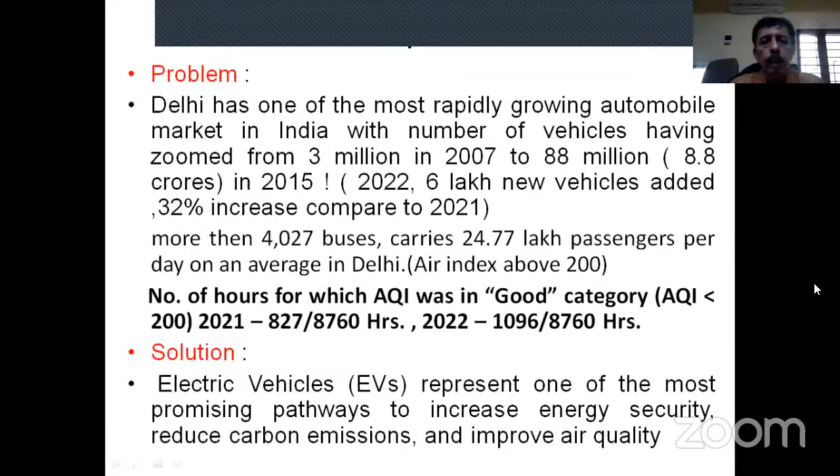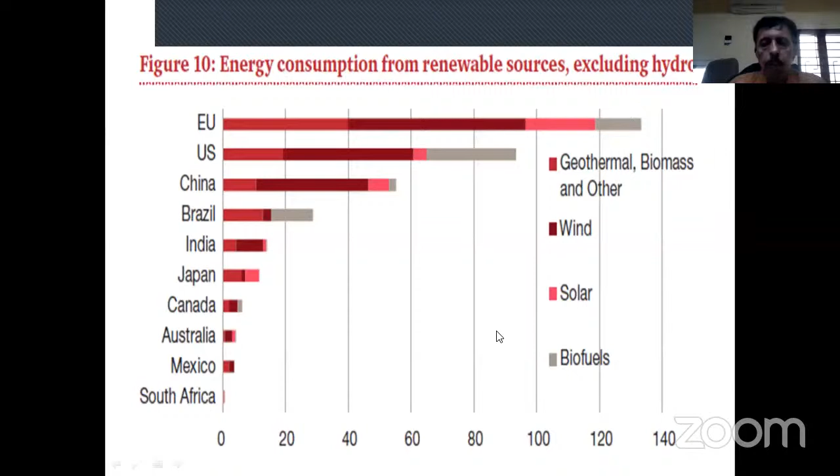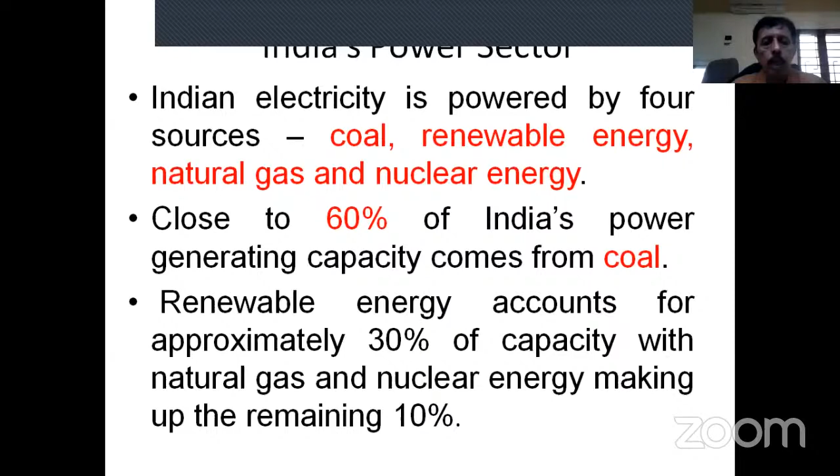India's power sector overview: Indian electricity is powered by 4 sources - coal, renewable energy, natural gas, and nuclear energy. Close to 60% of India's power generating capacity comes from coal. Renewable energy accounts for approximately 30% of capacity, with natural gas and nuclear energy making up the remaining 10%.

This is a comparison of power generation installed capacity in megawatts and percentage share, giving a clear picture of green energy development in the power sector. In 2019, renewable energy sources were at 74,082 MW out of total capacity. In 2021, it reached 1,04,879 MW, meaning 26.5%. In 2022, it reached 29.2%. Simultaneously, on the coal side, in 2019 the installed capacity share was 54.7%, reduced to 51.7% in 2021, and in 2022 it's 49.9%. This shows the overall development and implementation of green energy.

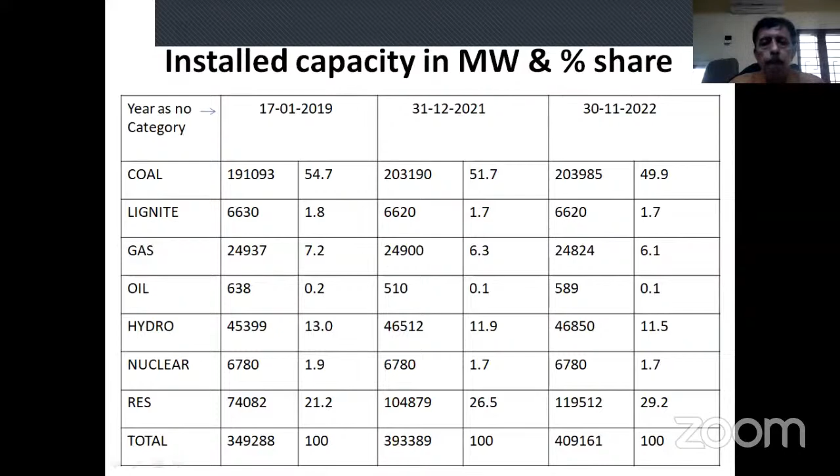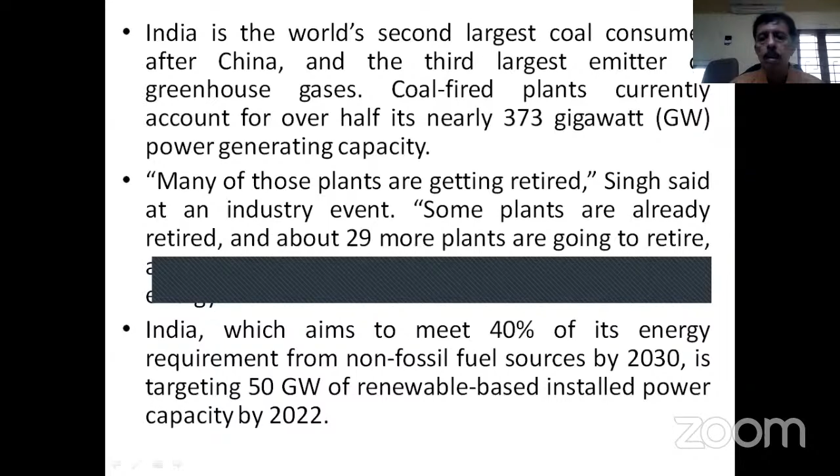Meanwhile, in 2016-17, electricity generation from coal-based plants accounted for more than 80% of the total power produced during the year. Private sector has had the highest share in coal-based generation, followed by the central and state sectors.

By 2022, renewables are expected to account for 33% of the country's power generation, and 60% by 2027, in terms of renewable power production.

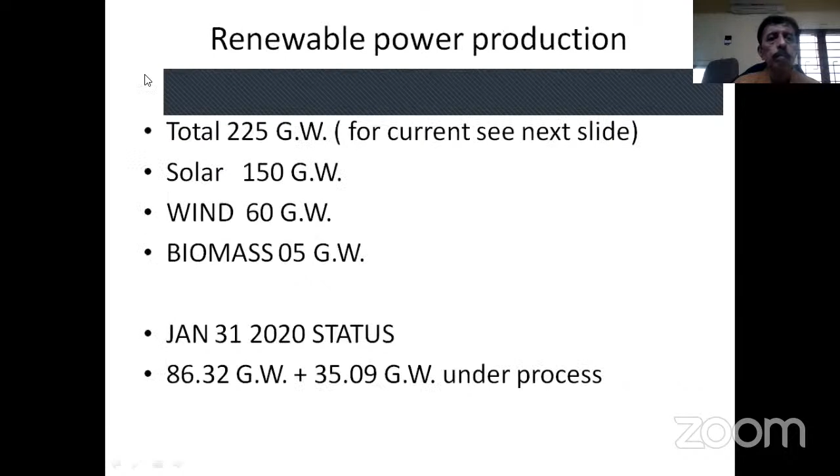According to the IEA coal report 2021, India's coal consumption will increase at an average annual rate of 3.9% to 1.18 billion tons in 2024, on the back of a GDP growth rate of 7.4% between 2022 and 2024, which will be partially fueled by coal. This is data as of 20 December 2021.

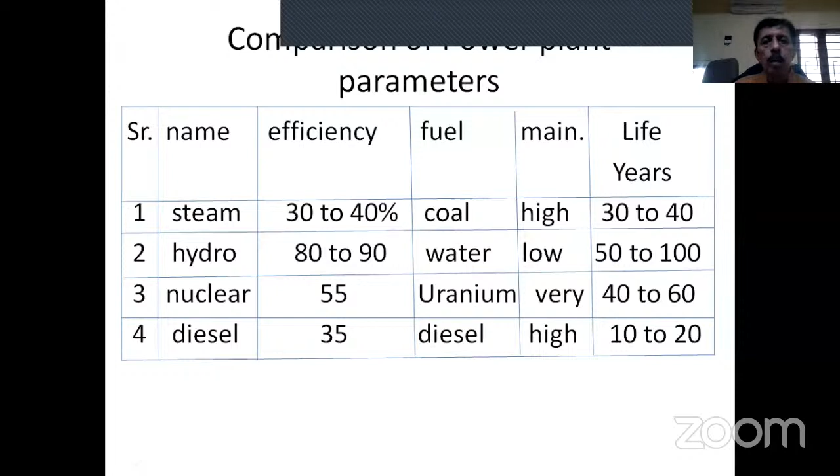So if we compare this, we can see that all power plants from non-renewable sources are up to 30 to 40% efficient, and that's why we are not getting much power from this type of source.

In that category, we don't have much development. And overall, wind operates at 40% efficiency at 9 meters per second, and solar is working at 20% efficiency.

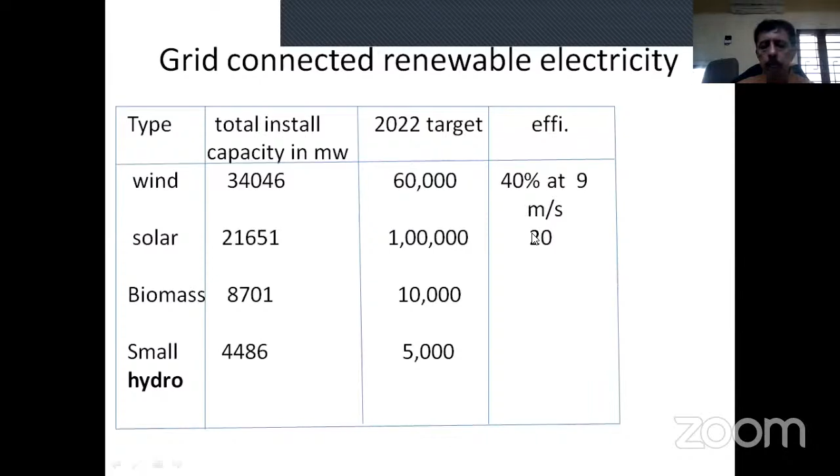Now, what is low carbon economy? We'll discuss. Low carbon economy refers to an economy that has a minimal output of greenhouse gas into the biosphere, namely an economic model based on small energy consumption, low environmental pollution, low carbon emission, and is an important progress of human beings after agriculture and industrial civilization. Briefly, the low carbon economy refers to the green economy based on low energy consumption and low pollution. The nature of low carbon economy is an important progress of human beings after agriculture and industrial civilization.

When we talk about the low carbon economy, we have to know about carbon credit. A carbon credit is the generic term for any tradable certificate or permit representing the right to emit 1 ton of carbon dioxide, or the mass of another greenhouse gas with carbon dioxide equivalent to 1 ton of carbon dioxide.

It is traded on the European Climate Exchange, and therefore if you emit 1 ton less, you will get 22 euros. Emit less and increase or add to your profit - this is the basis of carbon credit. A new study shows $185 per ton of CO2 means you will get $185 for 1 ton of CO2 less emission.

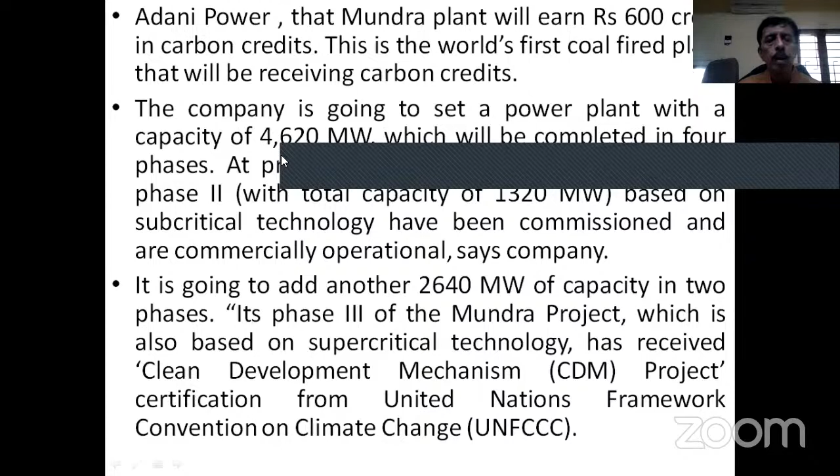The company is going to set up a power plant with a capacity of 4,620 megawatts, which will be completed in 4 phases. At present, all 4 units of phase 1 and phase 2, with a total capacity of 1,320 megawatts based on subcritical technology, have been commissioned and are commercially operational, as stated by the company.

It is going to add another 2,640 megawatts of capacity in 2 phases. This is phase 3 of the Mundra project, which is also based on supercritical technology. We will discuss supercritical technology at the end. This project has received a Clean Development Mechanism (CDM) project certification from the United Nations Framework Convention on Climate Change.

Similarly, with other power plants, we will discuss Torrent Power, Adani Power, JSW Steel, and their own power plant reducing equipment.

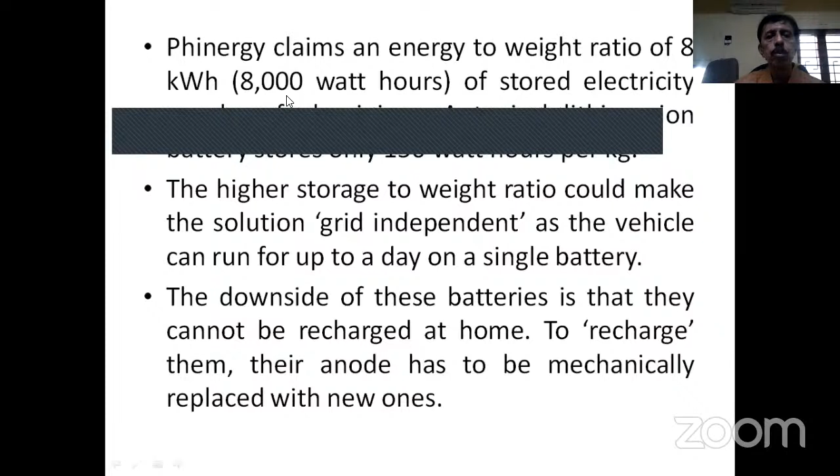Phinergy claims an energy to weight ratio of 8 kilowatt hours, meaning 8,000 watt hours of stored electricity per kg of aluminum. A typical lithium-ion battery stores only 150 watt hours per kg. So in this comparison we can see that aluminum air batteries will be more suitable for the next generation. The higher storage to weight ratio could make the solution grid independent, as the vehicle can run for up to a day on a single battery charge. The downside of this battery is that it cannot be recharged at home; to recharge it, the anode has to be mechanically replaced with a new one.

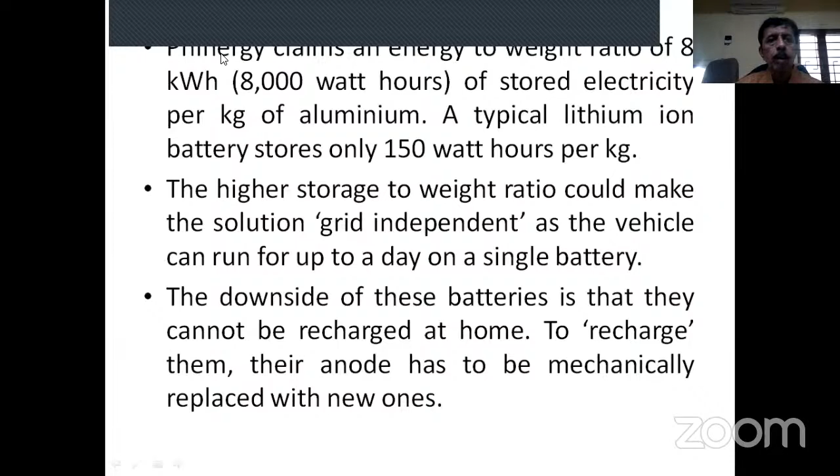Another development in the field of atomic power: the Kakrapar Atomic Power Station installed the largest nuclear reactor at 1,400 megawatts, producing 1.68 crore units of electricity using 3 kg of uranium. This is one of the most newly developed technologies, equivalent to 6,600 metric tons of coal. And this reactor is earthquake and missile attack proof, so this is also an important point to be addressed.

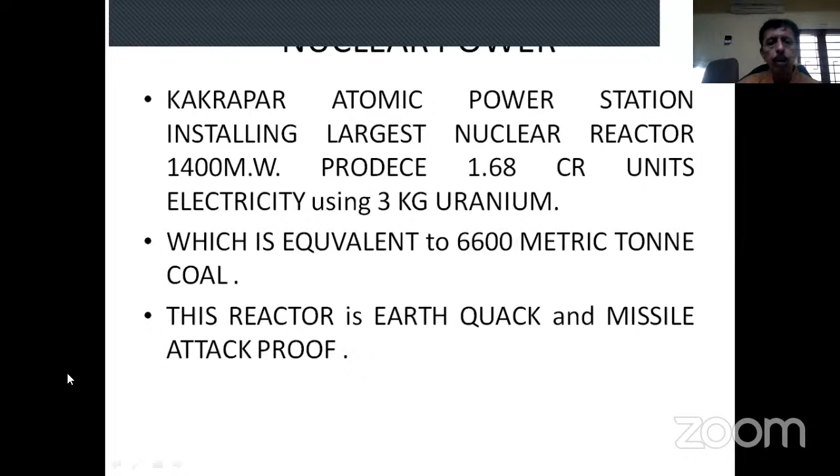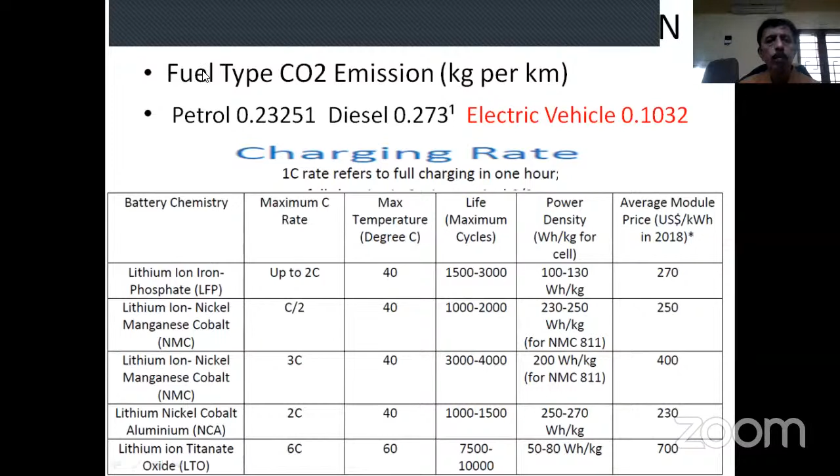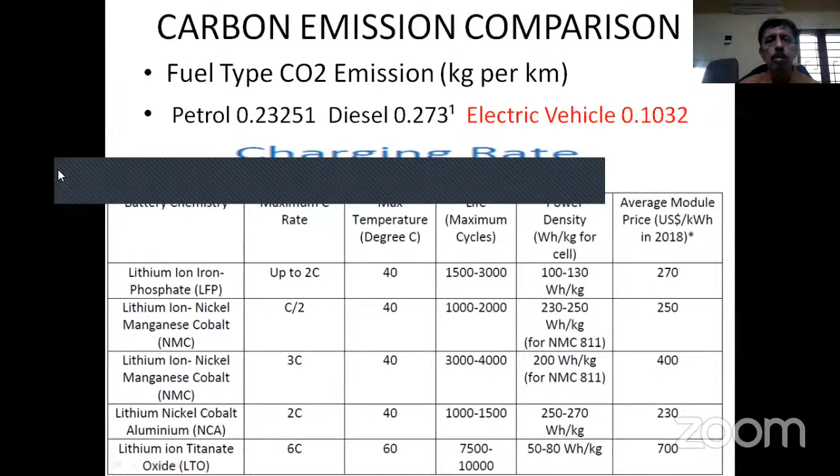This is the charging rate table. Looking at the latest developments, which reduce the maximum charging rate: up to 2C for some, lithium ion nickel manganese cobalt is C/2, another lithium ion nickel manganese cobalt variant is 3C, lithium nickel cobalt is 2C. This is the maximum charging rate, and this is the maximum temperature it can withstand. Lithium titanate is 6C. For life cycles, lithium ion nickel manganese cobalt has 3,000 to 4,000 cycles. We can also compare the power density and average module price. The lithium ion nickel battery is very good for use, but it costs more. The lithium ion titanate battery costs 700 per kilowatt hour.

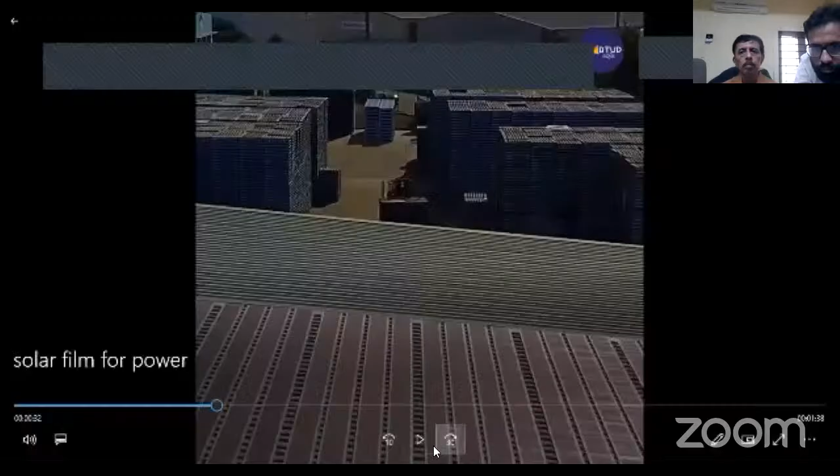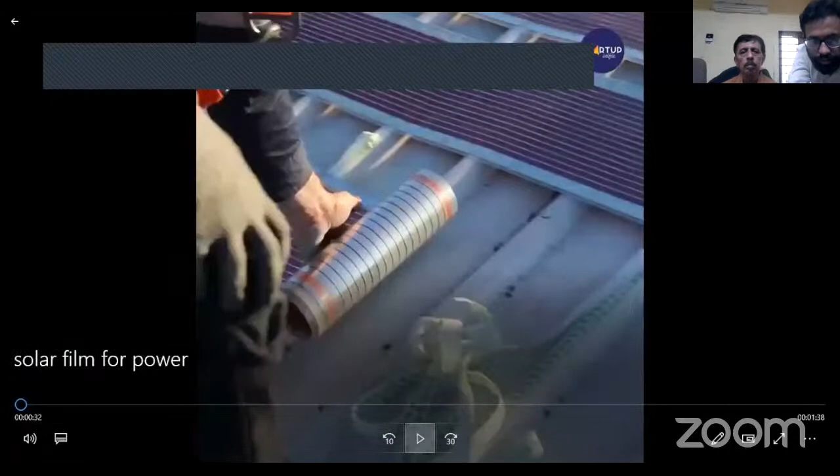Yeah. These ultra-thin solar panels can be printed like newspapers. The University of Newcastle, Australia has created printable photovoltaic solar cells, which could revolutionize urban power generation. The panels, which are only 0.075 millimeters thick, were created with proprietary technology, making use of organic polymers, which can capture solar energy and conduct electricity.

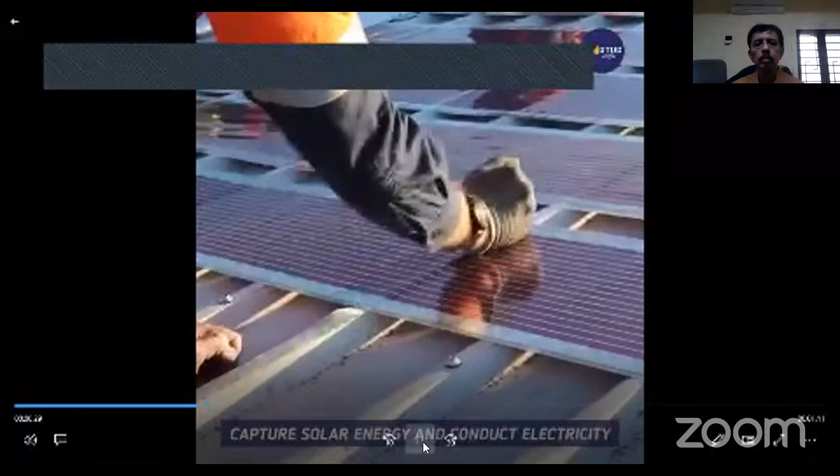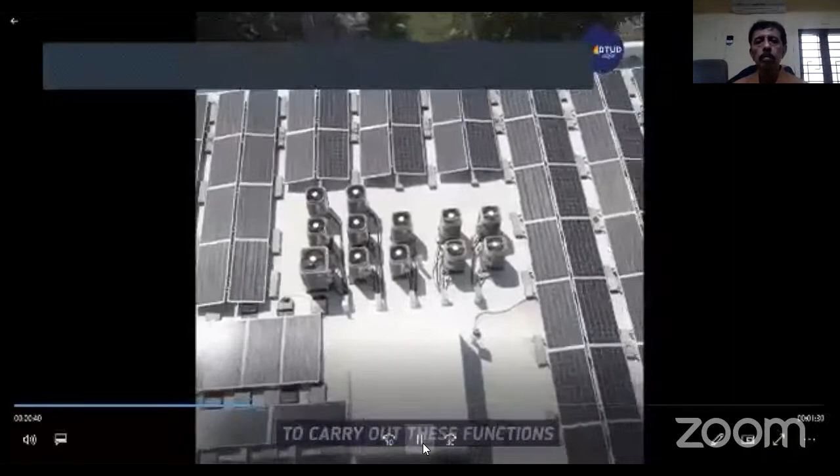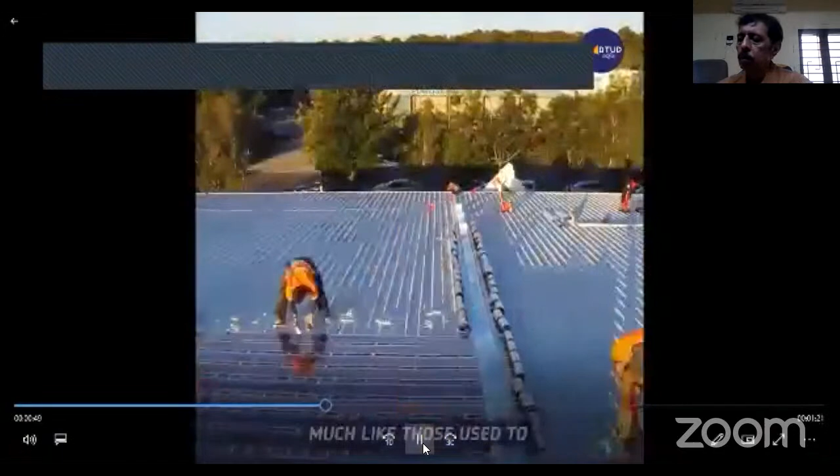Traditional photovoltaic solar panels rely on silicon to carry out these functions and can often weigh up to 15 kilograms per square meter. The liquid nature of the organic polymer means it can be printed from printers, much like those used to mass-produce newspapers and books.

According to University of Newcastle physics professor Paul Dastoor, printed solar technology has a number of broad applications, such as power for street lights, water pumps, disaster shelters, camping equipment, building smart blinds for buildings, and even powering vehicles.

The cost of production is also much cheaper than traditional panels, coming in at around 10 Australian dollars per square meter. A full-scale commercial plant could print kilometers of solar panels a day.

The printed sheets can also be stuck with a special adhesive tape to a variety of surfaces, meaning no expensive and intrusive installation methods.

The tech is currently on public display at the Canopy in Lane Cove on Sydney's North Shore. The panels, which are attached to a covered walkway, generate power for a series of lights that come on at night and track passers-by with sensors.

What do you think about the printed solar tech?

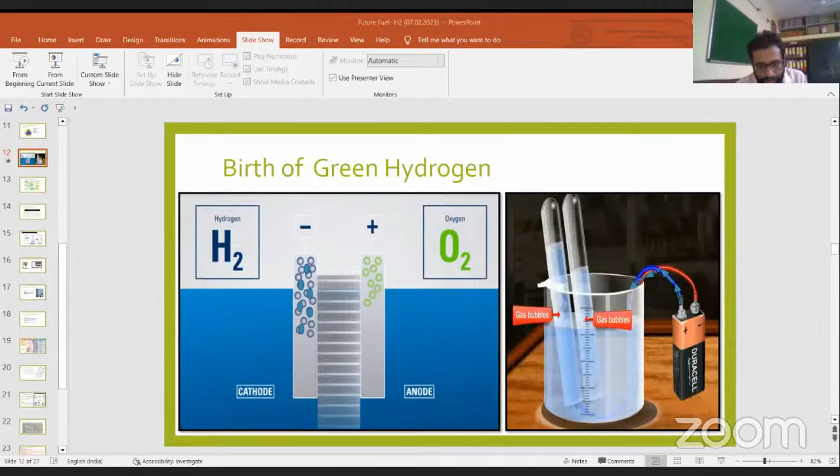So that's why this purity is very important. For that, we also have, on a high precise manner, the purging systems of the CO2, because the CO2 is your inert gas system. So we have these systems for hydrogen purity. These systems will help in a greater way, so that we can correctly and efficiently monitor the purity of this hydrogen.

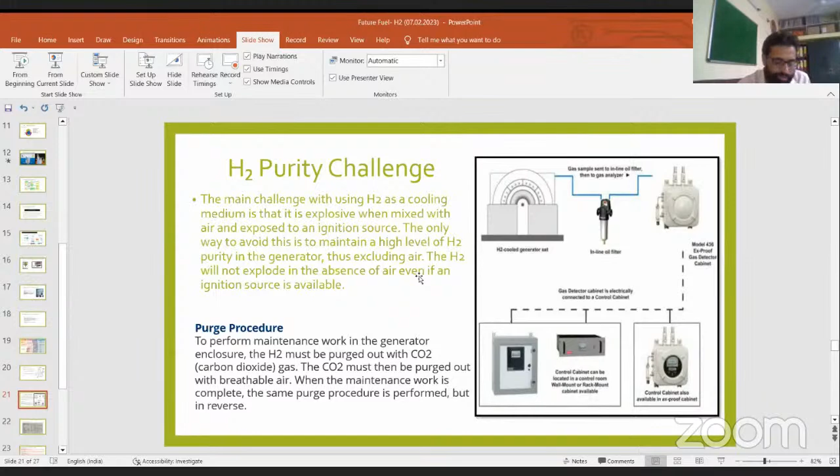Right now, I'm going to connect about the cost, the time duration, and the development. Right now it is in the decline segment, but still we have to work on the rate of production of hydrogen, and scale the size of the electrolyzer. On the global or international level, Germany has started using hydrogen in trains.

But if you go through the details of that case study, I must tell you that right now the rate of production of hydrogen is in a very lower segment, so we have to improve. Studies are also going on for how we can increase the rate of hydrogen production.

Here I'm going to state about the green hydrogen mission that is being provided by the Government of India. In this budget, they have allotted 20,000 crores of rupees for development, for infrastructure, for the supply chain, and easy accessibility to the industry. So I'm going to state about the green hydrogen mission.

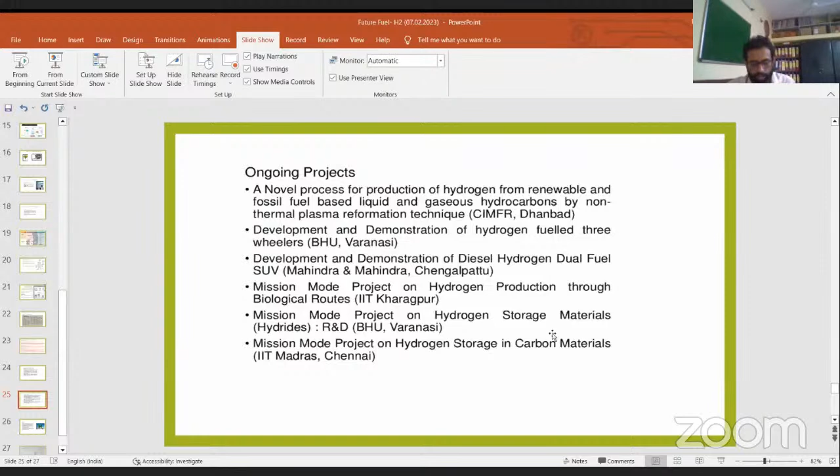So this is what we can say. Here I'm just going to tell you about the conclusion part. Right now, the main factor about fuel is which is going to be more promising for hydrogen fuel.

That is, it will have a high heat value. And second, the most important thing is that its byproduct or emission issues are going to be nullified. This is the major factor, but still we have concerns about proper use of hydrogen, proper production of hydrogen, storage, and transportation.

So the entire supply chain system must be developed, and the rate of production has to be economical. Technology development is also required, because if we talk about green hydrogen...

We are going through the electrolyzer method, but we have to parallelly evaluate other methods as well, so that we can achieve the maximum output or maximum rate of hydrogen production.

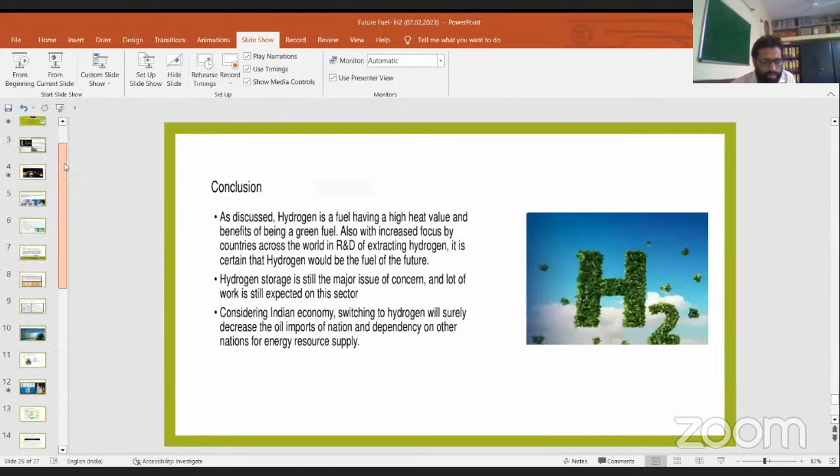I have explained this, but suppose the slides do not move due to some internet issues, so I apologize for that. But I'm just going to connect to one important slide that will give you much more detail, which is connected to the latest development.

Tremendous development has occurred, where hydrogen is going to work as what we can say as internal combustion. So hydrogen for the first time is going to be used as internal combustion in trucks.

So now I'm going to share a small video about that.